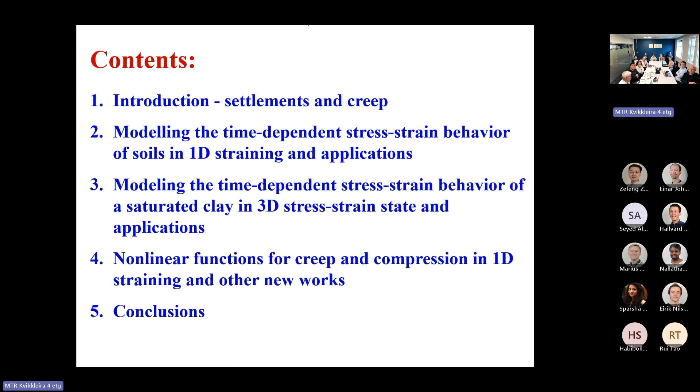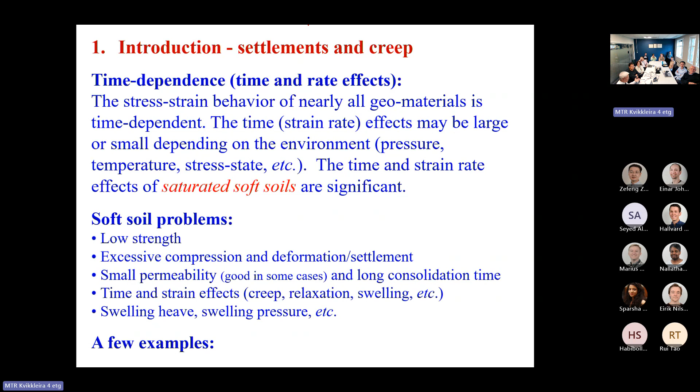So I don't want to go through this one, I will go one by one. Time dependency - I want to save time on this because the materials here, many materials have time dependency, including clay soils, soft soils you encounter in Norway. I don't want to emphasize this since you are experts - I have worked in this area for a long time.

One example is the settlement of the Tower of Pisa. The Tower of Pisa settled in the soil more than 3 meters and is inclined. I visited this site in 2000 with my family, my wife and my son. I took a photo of the joints surrounding the site.

So this Tower of Pisa is a good example of a structure on soft soils, settled more than 3 meters, inclined more than 2 degrees. If you look at the joint photo I took when I visited the site, you can see the clay - a sandy clay silt, upper clay, and also clay below. So there are layers of clays. That's why this tower settled more than 3 meters.

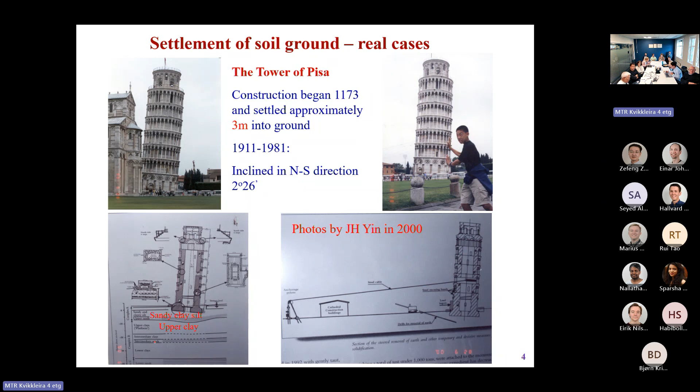Now the tower has been stabilized. I don't want to say more on that. Another good example is Kansai International Airport - 2 artificial islands, island 1 and island 2.

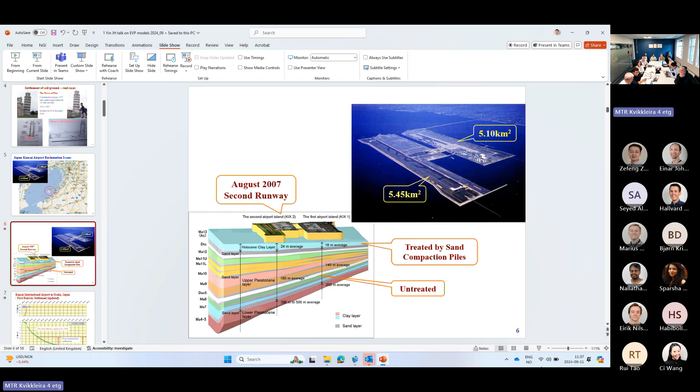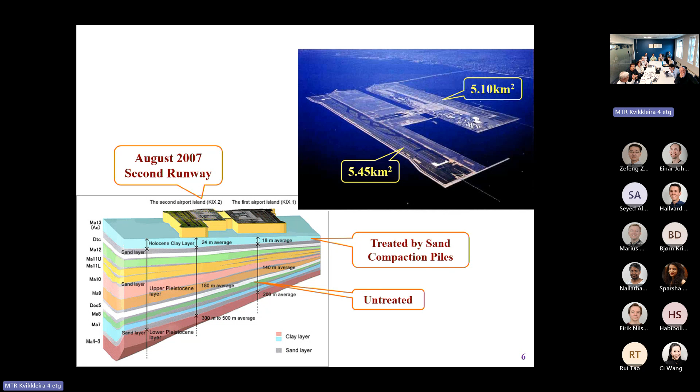Sorry about this one - this is island one, this is island one, island two. I can show you the problem of settlement, excessive settlement problems. For the first island, when the artificial island is built, they place the fill on the seabed up to a certain level, and up to say 1990 the fill is up to the level, construction finished. You can see the settlement continued to increase. And at this year, 1994, the first runway was opened, but there was still big settlement - more than 5 meters here, or more than 9 meters post-construction settlement for this first runway, which is huge.

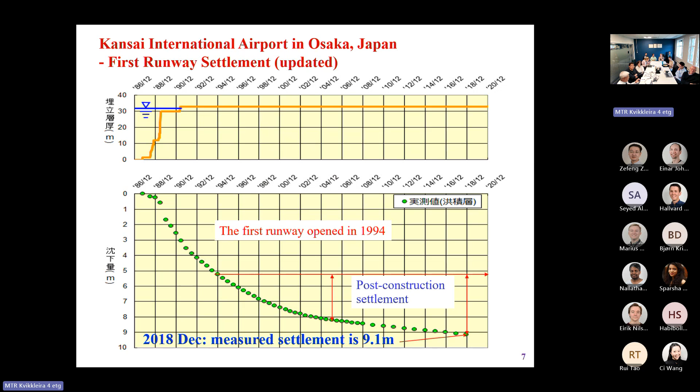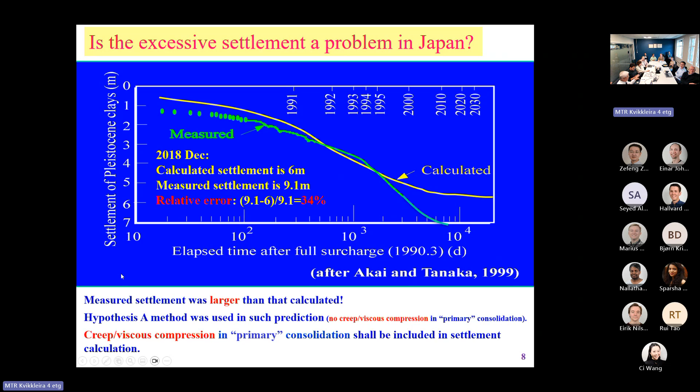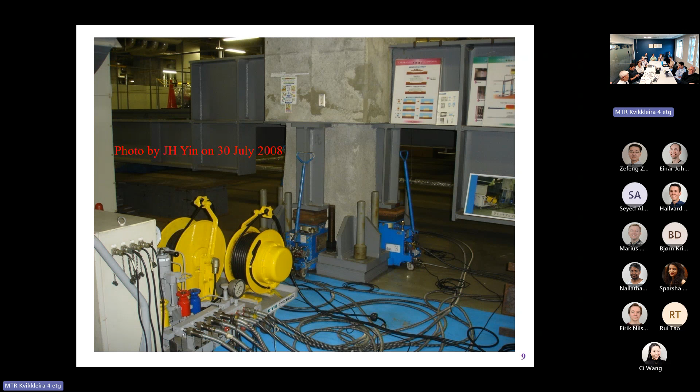So certainly something was wrong, and I believe something was wrong with the calculation method. So I visited this runway 1 in 2008 together with Professor Richard Jardine from Imperial College and other committee members. I went to the basement and they jacked up the columns and put a steel plate on the bottom to compensate for the settlement. Nobody likes doing this, but they had no good choice, they had to do it. Something was wrong actually from the beginning, in the design and construction. This is the issue.

This is the first runway, and the second runway - when I visited this island, the second artificial island was under construction. So they learned a lesson from the first runway construction. For the second runway, they applied surcharge longer, waiting for the settlement to occur for a longer time.

So you can see the settlement for the second island is bigger. You can see up to 2012, it's more than 14 meters - bigger than the first runway, because the second artificial island is further away from the shoreline. Also, I believe the fill materials they put on the seabed are probably higher, so the total settlement is bigger than the first island, but they waited a longer time, letting the settlement occur and the ground settle longer, so the post-construction settlement is smaller.

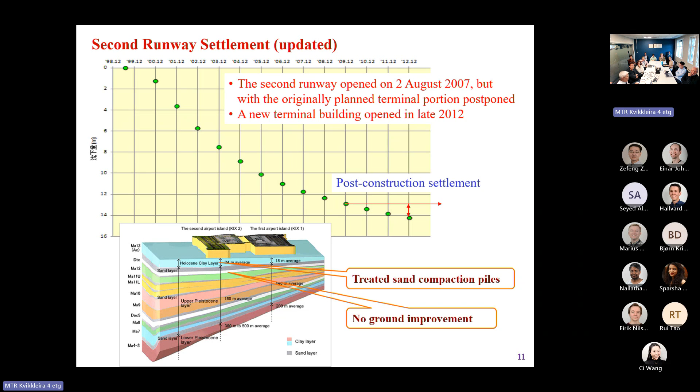What's creep? Creep is a phenomenon we observe - it's a continuous deformation of settlement under constant load. That's the definition of the phenomenon. Creep can occur in different materials - here we deal with clay, but even plastic and other materials can also creep. Creep itself is a phenomenon that can happen to different materials, occurring under constant load.

For example, for the oedometer test - I visited your lab just a while ago, you had many oedometers there. In the lab, for an oedometer test, the thickness of a specimen is normally only 20 millimeters, with a diameter of about 50 millimeters. You apply a constant load, then you can observe the compression of the specimen gradually increasing with time, nearly to infinity, but the rate of increase slows down, with no failure because the oedometer test is a confined test. You can see the time dependency very clearly, and from the oedometer test you get a very clear curve.

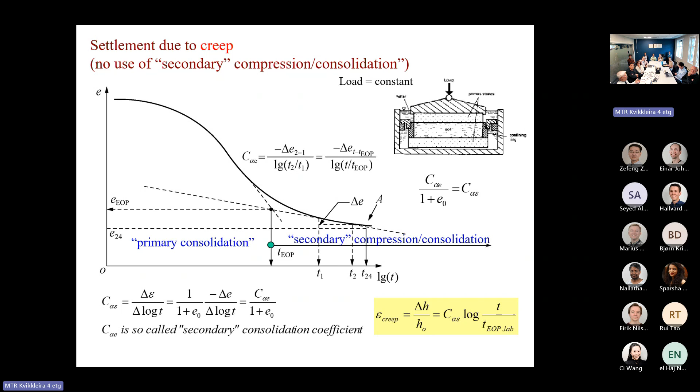From the data you also know very well that void ratio decreases with time under constant load, with the load kept constant. This is on a log scale of time. The void ratio decreases with time, and there's a very clear turning point here. People say this period before the turning point is the primary consolidation period, and after this period is the secondary consolidation period. This slope is a very famous parameter, the secondary compression or secondary consolidation coefficient, defined as C alpha E in terms of void ratio and log time difference. The larger the slope, the larger the viscosity of the soil, or creep. So this slope is a good indication of creep.

Peat is the organic source. It's highly compressible, so C alpha E is very big. C alpha E gives us an indication of the viscosity of clay soils. This gives you a range, and shows why clay has this kind of viscosity and creep behavior.

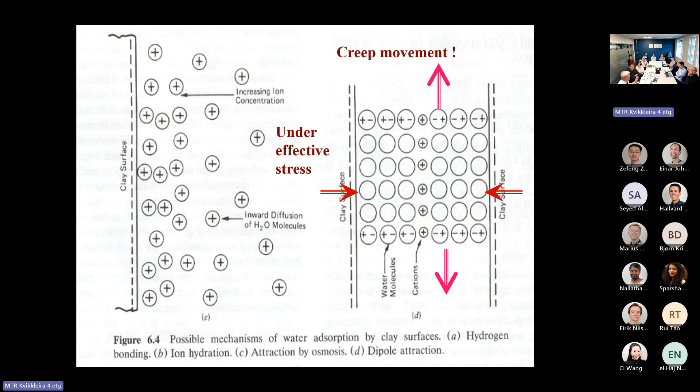I consider, and many people consider, this is due to so-called adsorbed water. Clay surface normally carries negative electrical charge. A water molecule has two poles, one positive, one negative. So the positive pole of the water molecule is attracted to the clay surface, which is viscous. I don't want to spend too much time, but it's mainly due to electrical chemical interactions.

So creep of the clay is mainly due to viscous adsorbed water. People also call it double layers, on the clay particles. There may be some deformation of small clay plates, but more important, I believe, is a viscous rearrangement, sliding deformation of the clay particle skeleton structure. The skeleton consists of clay particles, and this skeleton will have very large visco deformations.

Basically, we calculate the settlement deformation of soils, which is the settlement of the soil skeleton. Water itself is incompressible, so basically the soil skeleton is compressed—mainly the clay skeleton.

Adsorbed water is not free water, so it doesn't follow Darcy's law. Adsorbed water is the origin of the viscosity of clay soils, and it doesn't follow Darcy's law. Of course we have hypothesis A and hypothesis B. I will cover this area more, and how to calculate the settlement, in another talk on Friday.

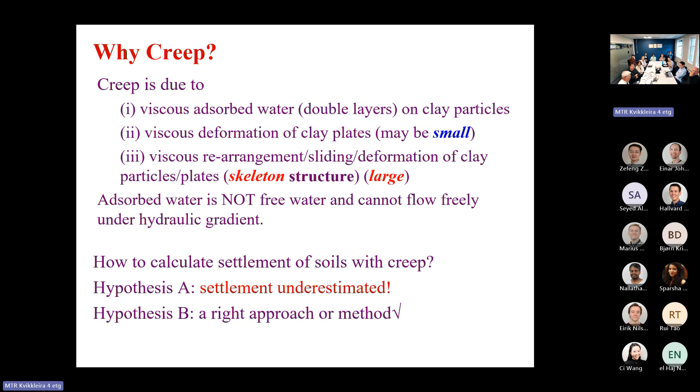Now, go back to the models—mathematical models. There are many linear rheological models already in the history. Hooke's law is a linear elastic model; you can consider it a special case of a rheological model. Considering no viscosity, the material behavior becomes elastic—a special case of the rheological model.

Newton's visco flow body is considered the viscosity source, very similar to Darcy's law. Darcy's law considers water flow in the pores, while Newton's law considers the visco flow of materials. Similar to Newton's law, there's also rigid plasticity.

These are the basic elements. People combine them together to create different linear rheological models, including Maxwell's model, Kelvin's model, and other composite models. But all of this is linear rheological models. So my work is to extend the linear model to nonlinear, based on new understanding of soil behavior.

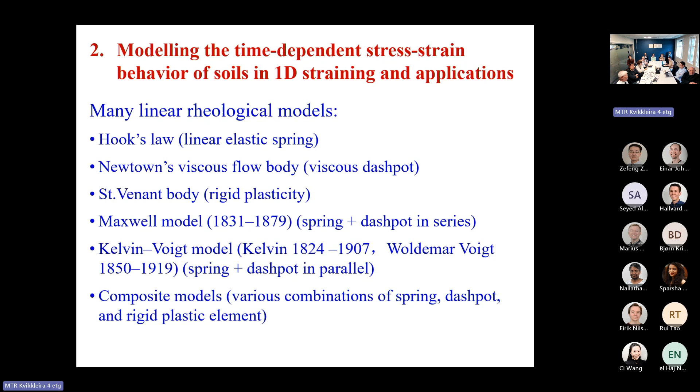Maxwell's model is a very famous model, a combination of a visco dashpot, which follows Newton's visco flow law, and an elastic element, which follows Hooke's law. The two elements are connected in series, giving us the Maxwell model. It's very famous, but it's a linear rheological model.

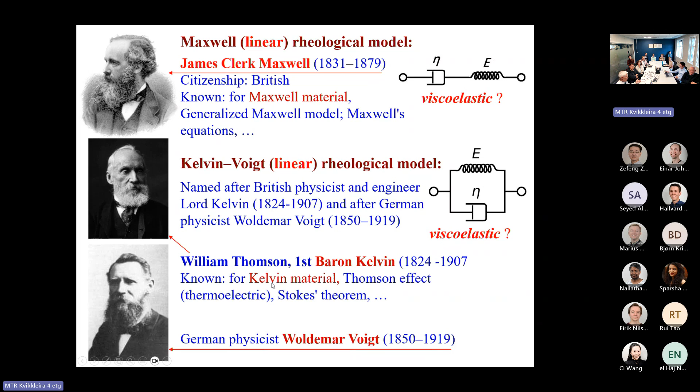Kelvin's model has the two elements connected in parallel. I don't need to go into all the details, but for the Maxwell model, we can derive the Maxwell linear model very easily here.

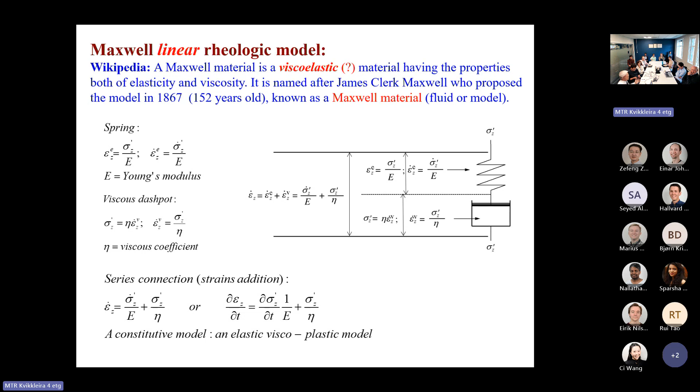But unfortunately, this linear model is really not good for soils, so we need a nonlinear model for soils. You can see there are many combinations of different elements—I won't go into details.

Here, some Chinese researchers did some early work—two persons, one in China, one in Canada. Their original work was to combine a linear rheological model with consolidation equations, applying linear rheological models to soils to consider the coupling of water and the soil skeleton. That was their original work, the first one to do this. But they didn't develop any model themselves, even a linear one—they just applied other people's linear rheological models to consolidation problems.

Professor K.Y. Lo is a very famous professor at Western University, Ontario.

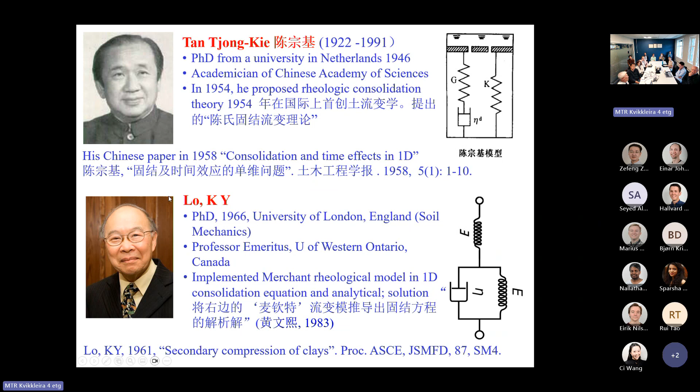Of course Professor Graham is quite a part of me because of my original contribution area. As I mentioned, if Professor Dr. Bjerrum were alive, I think he should not be disappointed with me, because I developed a model based on his original concept. This original concept is this diagram. This diagram is very important, very original work by Dr. Bjerrum.

This diagram looks very simple from the oedometer test. You can do such a test very easily in the lab, at NGI. I can discuss a little bit more on this one - what this diagram implies, and what I have done based on this diagram when I was a PhD student. This is a very important concept I want to mention to you. You can apply the concept for different soils later by yourself.

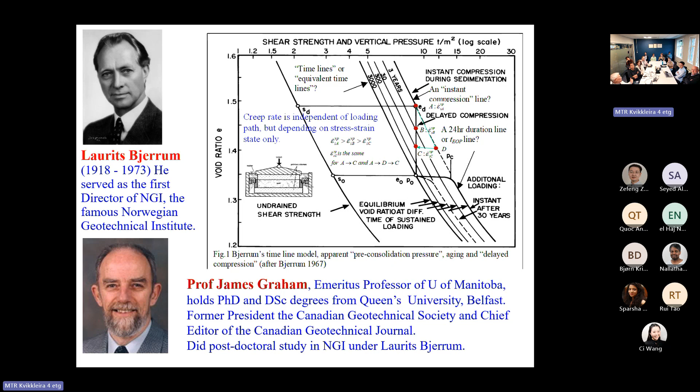Nothing to do with how you got to this point, nothing to do with it - that's what I want to explain. Actually, I spent a few more years later trying to understand this even better, but you can see my equations are consistent.

This is viscoplastic - the elastic strain rate, this viscoplastic strain rate is dependent on effective stress and strain only. Once the strain and effective stress are given at the point, the viscoplastic strain rate is fixed. It's all here, all the parameters, don't worry.

This is a very important scientific finding. I don't say it's mine alone - other people have similar findings, but probably they didn't emphasize this much. But for us, that means we can do quick tests to get the viscoplastic strain rate.

This kind of viscoplastic strain rate can be applied to any loading process - as long as you know the effective stress and strain, the viscoplastic strain rate is fixed. You can see my equation can give you the answer. Stress and strain is given. You have a question then.

Hello, it's me. I'm sick today, that's why I'm not really there in person. But I have a question on this point - is it also related to the loading cycles? I mean, if you load it for several times, I'm not sure - loading and unloading once versus loading and unloading 10 times, do you think that will be different?

This is a very good point. Actually, I have thought about this problem for some time before, because I will show you later.

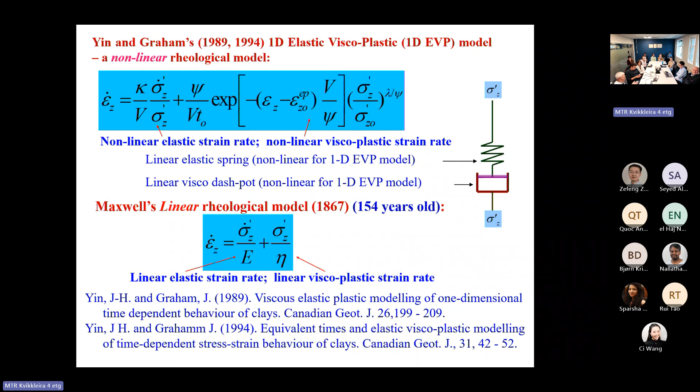As I mentioned before for the oedometer test, the Maxwell model gives you a wrong answer, because the behavior of soil in the oedometer test is nonlinear. Okay, I'll go quicker, otherwise I cannot finish my talk in 45 minutes - but I will control my time, don't worry about this.

I have a number of very basic papers already published - if some people are interested in this, you can read them. No need to go into this one.

Oedometer test - what I'm discussing next is how to derive this one-dimensional elastic-viscoplastic model based on my concept. I don't need to go into details - all of my concept models can be derived step by step by step.

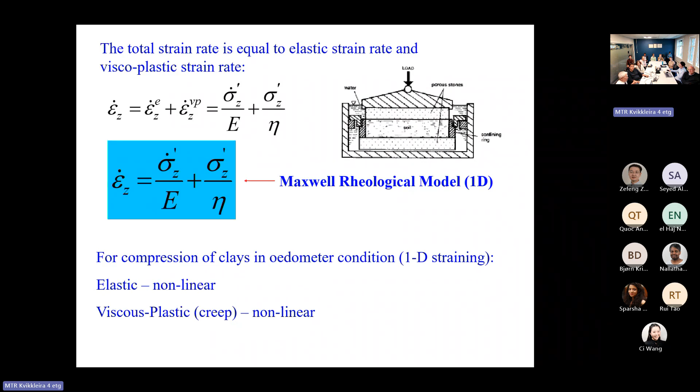Based on this model again, you derive - very important is how to divide the strain rate into two, three, or four parts. In my study, I divide into only two parts: total strain rate divided into elastic strain rate and viscoplastic strain rate. Some people, as you can read in the paper, divide this into three or four.

I don't know, but to me, only two terms are good enough. Then how to derive each term? The following slides can show you step by step. But based on my concept, everything can be derived, on the slides or on the paper.

That's the building. So my concept model is not a curve fitting, it's not an empirical relationship. It's really logical, theoretical models derived. And also I want to say this: you can see some curves here, like compression line, Cam-clay model, and so on.

The elastic plastic line in Cam-clay model is the lambda line. They normally consider in the log scale it's linear. I'll show you this one is better. In the log scale, this is a compression line, and this is a lambda line, which is linear.

If for some sensitive clay, I know the NGI people study sensitive clay. When I was visiting Helsinki, a professor there also mentioned sensitive clay to me. Sensitive clay is not really a straight line, it has some curves and so on. Okay, it's different.

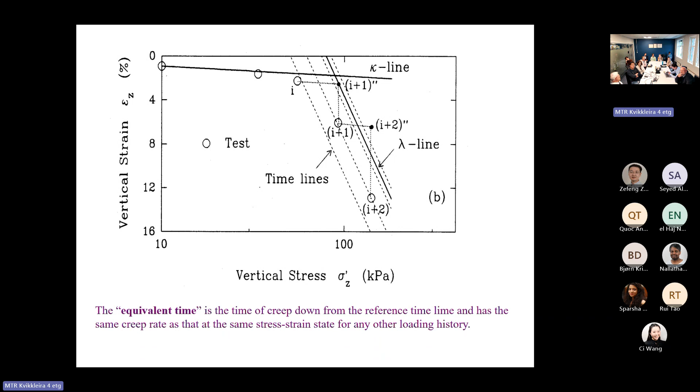My work can be a basis. I'll go into details, or I won't go into details -- all the details here are just to show you how to derive it. I want to skip this one.

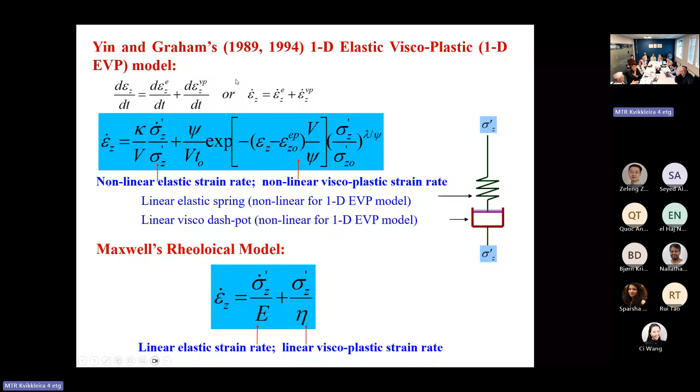So finally, I can get this elastic viscoplastic model. You can see this part is the elastic strain rate, and this part is the viscoplastic strain rate. That's so simple, derived. I don't go into details.

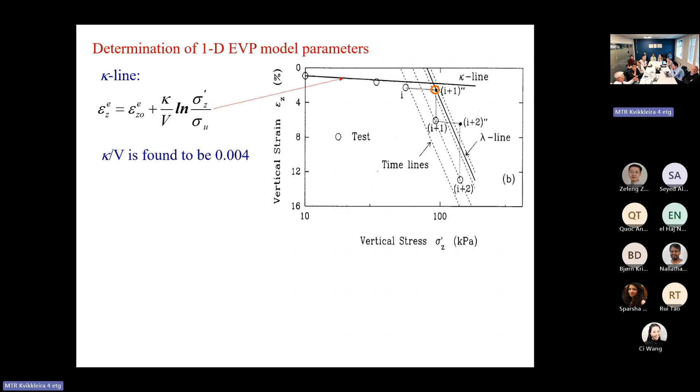How to determine parameters? You can use a rigorous way or a simple way. I want to skip, I want to skip.

One thing is for engineers: engineers know conventional parameters very well. So I try to link the model parameters in my model to the conventional parameters, so engineers can use it easily.

For example, sorry about this one -- CR is an elastic index, compression index, or unloading index. CR is related to kappa. And the compression index, CC, is related to lambda. The secondary consolidation coefficient, C alpha e, is related to psi. V is 1 plus e0. So all the parameters in my model can be related to conventional parameters.

So engineers can determine the value of the parameter very easily. This is what I want to say.

Okay, here I'll go back to cyclic loading. You see, the real behavior is a loop, unloading, reloading, but we simplify it as a line. It's a simplification. So how, on the cyclic loading, where the behavior is a loop...

Even on cyclic loading, the particles can get closer, even for clay. I believe cyclic loading contributes additional influence on the behavior, but I haven't done work on that yet. I believe if some people have time, you can try to extend my model to consider cyclic behavior based on your data, but I have no time to do it. My model, my concept, my framework can be a good basis for you to work on. That's what I want to say.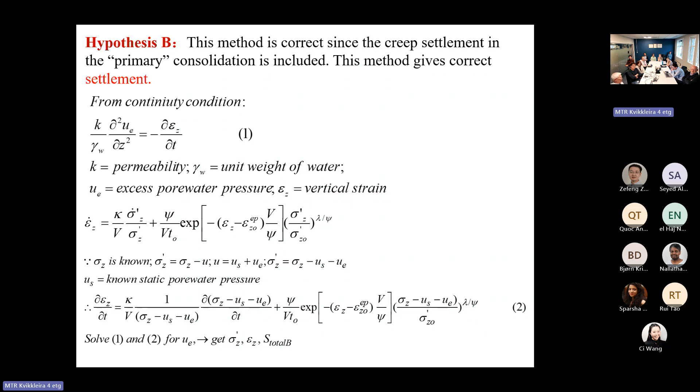And hypothesis B, hypothesis A, I don't want to go into details because I have another talk on Friday. The two different hypotheses for settlement calculation, I'll skip this one.

A very important thing is my original contribution was recognized by Geotechnique. In 2008, Geotechnique published a review paper covering all the papers published in the past 60 years. They selected some papers they considered to be milestone contributions, and my paper was actually selected. They gave very high remarks on my model. You can see equivalent time, it is the model of Yin and Graham.

Actually this is a consolidation paper, an application of my one-dimensional elastic viscoplastic model to consolidation problems, published in Geotechnique. It's not a constitutive model itself. He said this model introduces the equivalent time concept. Actually, Professor Bjerrum's paper mentioned equivalent time first, so it's not original to me, but I gave a very clear definition of equivalent time. That makes a step forward for modeling creep. So my contribution, my model, makes a good step forward in this area, and they have more.

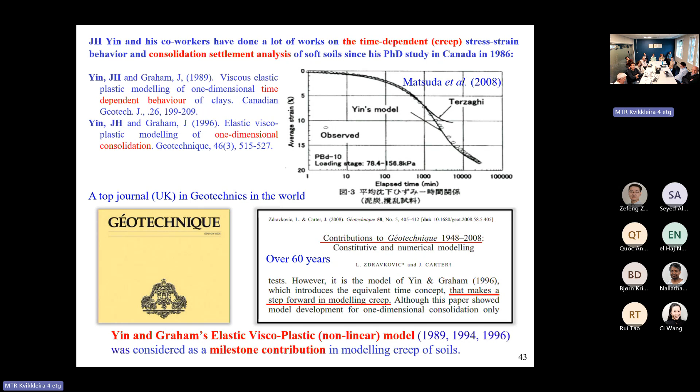Well, I'll just sign off a little bit here, I don't work on this one. Later, I extended the one-dimensional model to three-dimensional. How you extend this one-dimensional model to three-dimensional is also based on previous work.

Number one is Perzyna's work from 1966. Second is the modified Cam Clay model. Cam Clay cannot consider creep, but it's a very good elastic-plastic model, a framework I can build my model on. Everything I presented here cannot solve all the problems, but can be a basis for you to develop other models, you know what I mean? Including myself, I develop my model based on other people's work. So you can see Perzyna's work, the modified Cam Clay model, and my one-dimensional model are the basis.

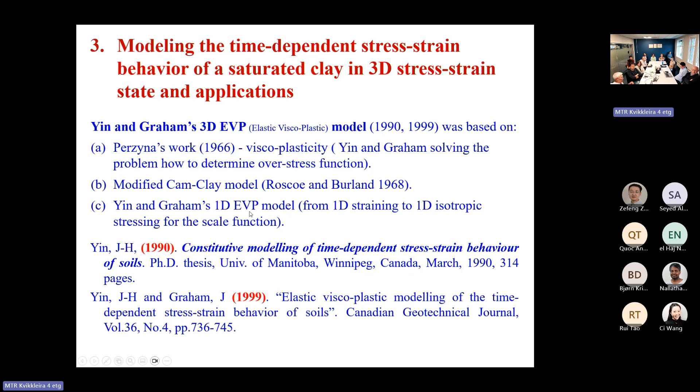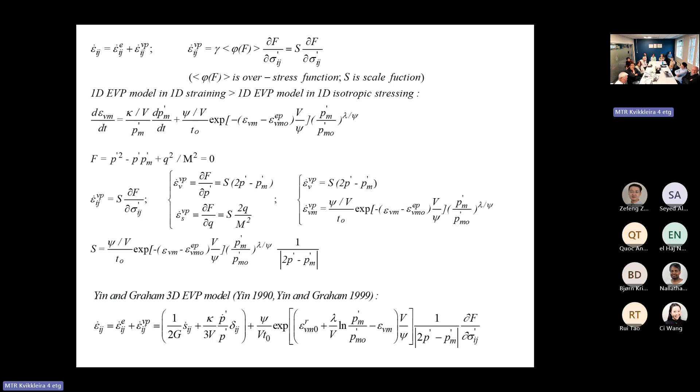Based on these three, I can derive a new model. I won't go into details, the actual three-dimensional model is this equation, it's here, that's it. I don't go into details, today in 45 minutes, I remember that. And we also apply my model to solve consolidation problems.

One thing I want to mention here: I told you that under cyclic loading, sand can generate additional pore pressure and liquefaction. So cyclic loading can generate pore pressure. Another thing people probably don't pay attention to is that creep of soils can also generate additional pore pressure in soils. Under constant loading, creep can generate additional pore pressure, and there's a good example of this.

This example is an artificial island on the seabed in Canada, in the north of Canada, where they did some measurements. You can see that when the artificial island was built, the pore pressure at a certain time still increased, then decreased, increased, decreased. According to Terzaghi's theory, if the soil behavior is elastic-plastic, the pore pressure should decrease from the beginning to zero, but in the middle period, pore pressure increased.

People tried to simulate this but couldn't. I found this is another reason why pore pressure increases, not due to cyclic loading, certainly not cyclic loading here. It's due to some other reason, it's due to creep. So my published paper studying this issue in 1999 explained this kind of pore pressure increase is due to creep. If you know how to do a triaxial test, I'll tell you, it's very simple.

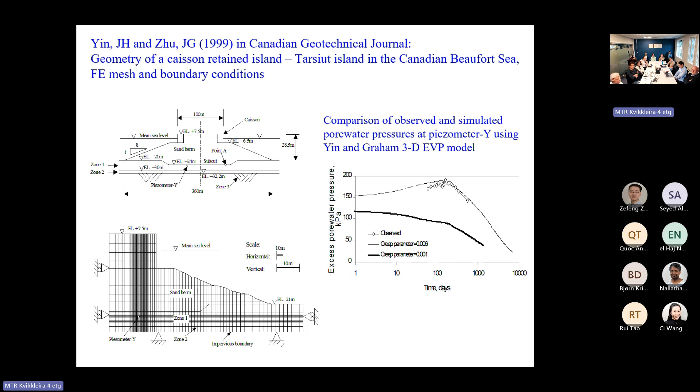I published a paper on this issue that makes it understood very clearly. That's why I said you ask a good question. Cyclic loading can be another factor contributing to the tightening behavior, but I have no time to study it. So this is a good reason to explain to you.

Another interesting thing is the soft soil creep model, very popular in Europe. Actually, I didn't pay much attention to this one in my life—always doing work, no time to go back. My students actually found out the soft soil creep model is very similar to my three-dimensional model, 95% similar. And I believe I published my three-dimensional model much earlier.

Published in my thesis 1990, journal paper 1999. Professor Peter Vermeer, I know him very well, published a conference paper in 1999. So my work was done ahead of theirs. But some people in practice, when considering models, never mention the origin—they just use the model, put it in. So this model in practice is very similar to my model, but my model was developed much earlier, at least nearly 9 years earlier, in my thesis. Just one example to show.

But you use the soft soil creep model in practice, which is elastic, a three-dimensional elastic viscoplastic model. So it's good, it's a good model—even my students use it, because the commercial program is very easy to do. If you want to write your own routine, it's very difficult, you know what I mean.

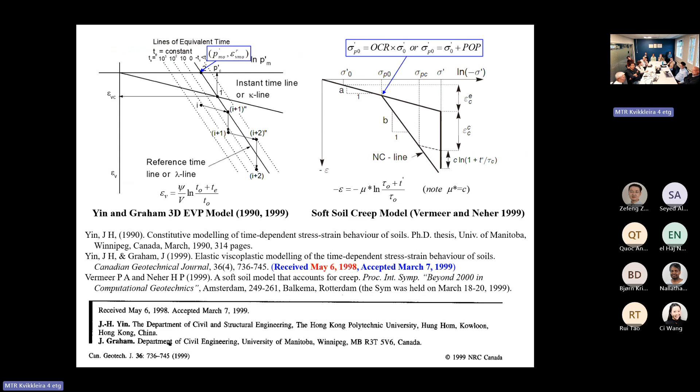I won't go into details. One more thing is also related to Bjerrum—you can see the curve at high stress is not really parallel, it's getting close. Of course, at small stress range it is parallel, that's okay, not too bad. But at very high pressure, the curve will converge.

It's not linear because the void ratio cannot go below zero—at most, the void ratio reaches zero. So if we use a log function, void ratio can go to infinity, or even go negative. This is a contradiction, it's not right.

Another thing: when the creep goes down, if we use a log function to fit the oedometer test, you're in trouble. When time goes to infinity, void ratio can be negative. You can see as time goes to infinity, this e zero is constant, but this goes negative. Void ratio cannot be negative.

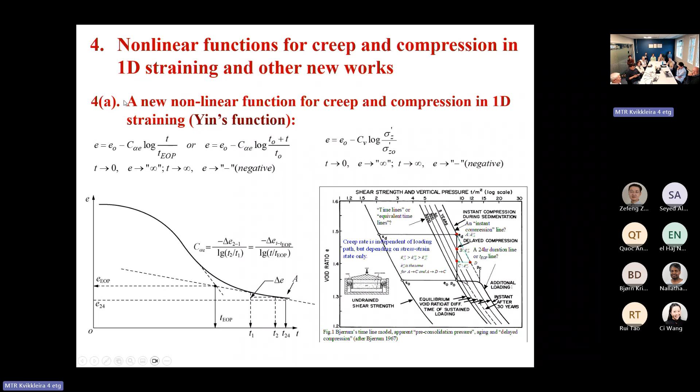So this log function can fit the data in a small range, but if you go to a longer time, a larger range, it gives you wrong results. How to solve this problem? I propose a new function which is very simple and can fit the data very well—it's a combination of a hyperbolic function and a log function.

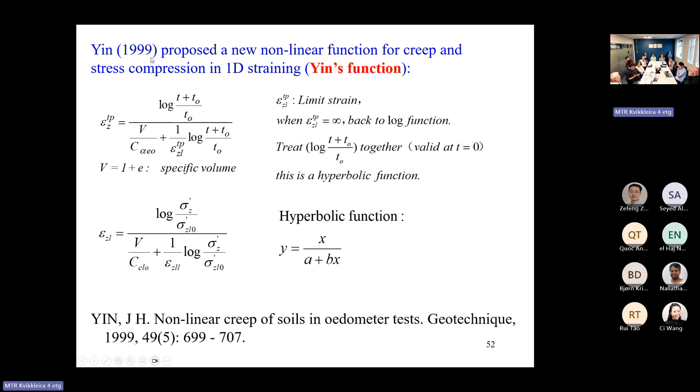I spent a few years to figure out a good function. The hyperbolic function has a limit, the log function has no limit, but the log function can fit the data for a certain range very well. So I combined the log function with the hyperbolic function together—it's a beautiful function to fit this nonlinear behavior. Based on this new function, I can also derive a new elastic visco-plastic model. I published a very technical note in Geotechnique which is highly cited, really highly cited, 1999. It's a good function.

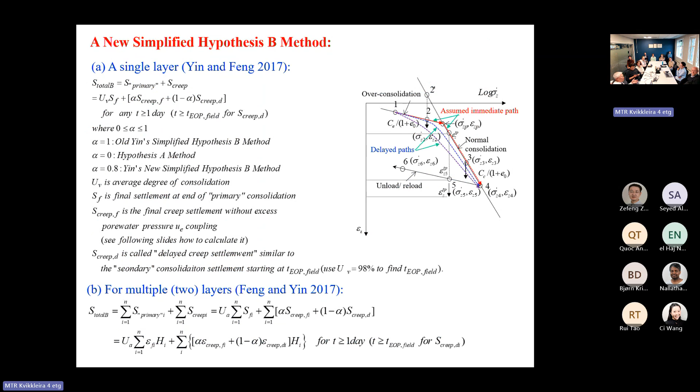Some people have extended my work for different areas. I won't go into details, just simple methods I will cover on Friday. I don't cover that here. I'll give more time for you people to ask me questions, about 45 minutes, oh sorry, it's a little bit beyond that.

Now I want to draw a conclusion. Number one, creep strain rate, which is the viscoplastic strain rate, depends on the stress-strain state only. Once you know the strain, stress here is the effect of stress, then creep strain rate or viscoplastic strain rate is fixed, nothing to do with the loading path. That's what I mentioned to you.

Based on Bjerrum's diagram, I explained this observation. Yin and Graham's one-dimensional model, it is a good rigorous extension of Maxwell's linear rheological model. I say it's rigorous because, based on the concept and understanding the framework, I can derive this model by hand. No fitting, it's not empirical. Use the same concept, the same framework, and you can derive your own model. So it's a framework, it's a concept, okay?

My three-dimensional model is a good extension of the modified Cam-Clay model. The Cam-Clay model cannot consider the viscosity of soils, but my model can. In my model, when the viscosity parameter becomes 0, my model automatically shrinks and reduces to the modified Cam-Clay model.

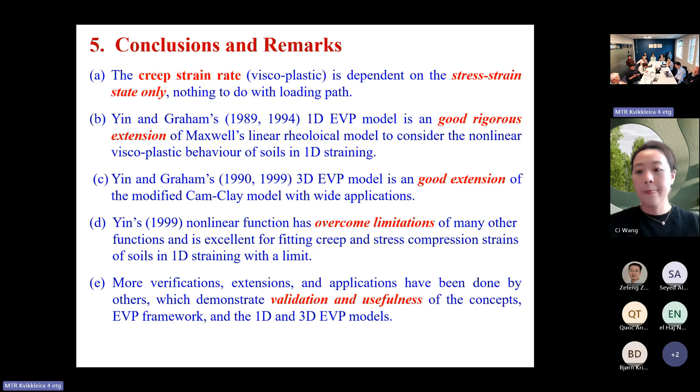It's consistent, okay? And I also suggest to you a very simple nonlinear function to fit some good data, with some limits, to overcome limitations of some functions. Log functions give you wrong results at large stress for longer time, some errors. I can overcome those limitations.

More verification, extension, and applications have been done by others, which demonstrate the validation and usefulness of the concept or framework. Other people have extended my model to other situations, and you can do so by yourself. My model is not empirical, and many people made contributions to my work. I want to acknowledge them, but due to time limits, I won't read them out.

Thank you very much for your attention. Thank you.

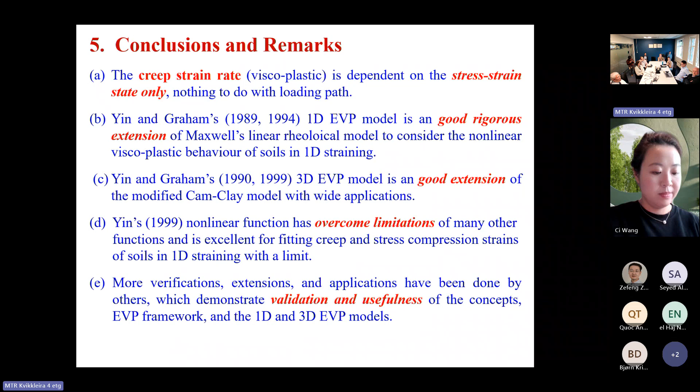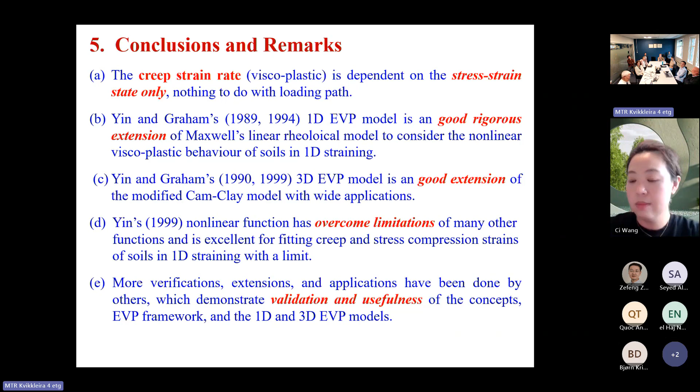Of course, everyone who has been looking into creep has also been looking into your papers, so they give a good background for understanding creep behavior. So I was reading your papers, your initial papers. And of course, Bjerrum, we are reading, and this isotach concept of Bjerrum is extremely important. That is the background, I think, of most of the models used today, that at least a lot of people believe in.

But into this, and also into your models, we wanted to study this concept by laboratory tests. And of course, we have this creep going downwards, and we're talking about 300 years and 3,000 years. We cannot wait so long. So what we did was a creep test, in a triaxial test, to have control of the K0, because in an oedometer you don't have control of the K0. We were creeping for 1 year, and then we wanted to check whether we can find these isotach lines by unloading.

Okay, should it be the same? So same as you say there? Yeah. So we had, in a way, found all these creep lines by having one test creeping for 1 year. Then we started at the same point, doing different unloading to different levels, unloading, and then measuring the strain rate at the different amounts of unloading.

Good idea. And we did that, and in addition we had an oedometer curve, and also that triaxial test, to measure the non-linearities of this. So the lambda value that you mention is not linear, we also found the non-linearity of that, and looked into the kappa value at different unloading steps. So we were finding all the parameters and wanted to see whether this fits together. I will show it to you, and we can discuss it later, because we have all this data. But in reality, it didn't fit perfectly. There were some questions we had. We needed to modify some of the parameters, and we don't have an explanation why we needed to modify them.

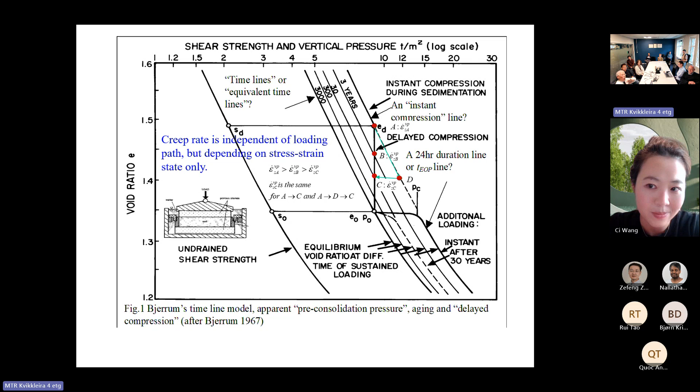Okay, number one, many people consider creep a small thing, contributing very little to the settlement. And people say, is elastic plastic deformation the main contributor or not? This concept is wrong. Okay, I want to correct that. I want to go back a little bit related to settlement. I will answer all your questions later. Okay, one very important mistake, misunderstanding, is people consider creep is small, elastic plastic is big. And for example, I want to show you.

People say for the loading to here, at a certain loading, for example, from 1 to 2, from loading to here, then come to here, okay? This is according to the Cam-Clay model. This is the lambda line, so then this is settlement, okay? We need the settlement, the creep here is small.

This is a very important concept, people. This is a reference timeline. Lambda is the elastic-plastic line. You load from here to here to here, then this is compression related to settlement.

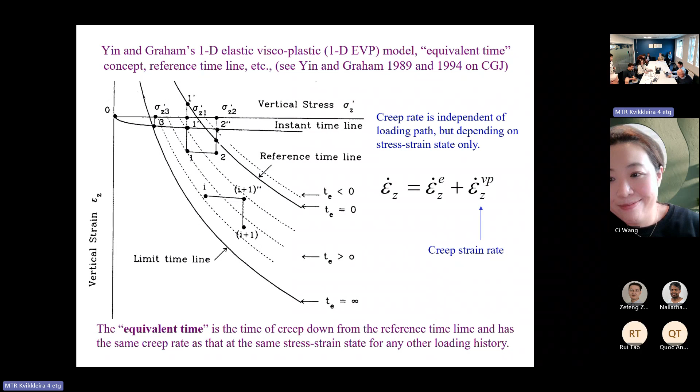Okay, thank you. Yes, I already had learned.